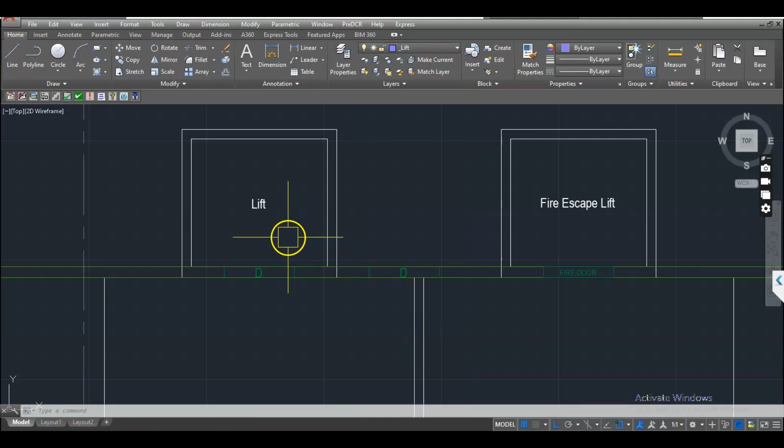First, let's learn to draw a lift. Go to the layer drop-down, select the lift layer, and draw the lift in the lift layer as a closed polyline. It should be drawn on the inner dimensions of the lift wall. Similarly, the lift should be drawn on the same location on all other floors till the terrace floor.

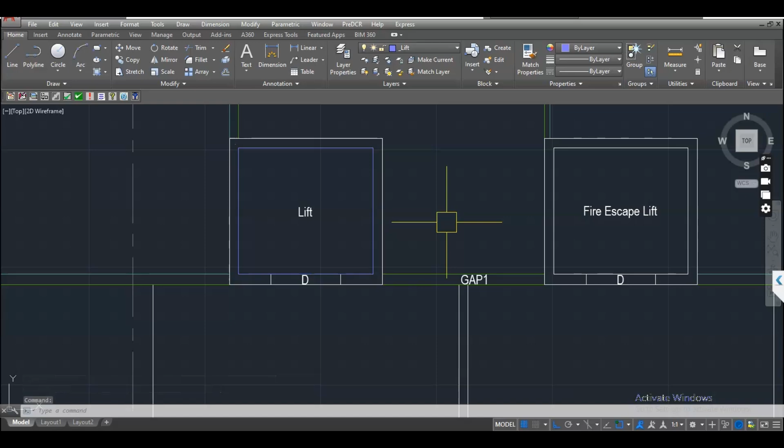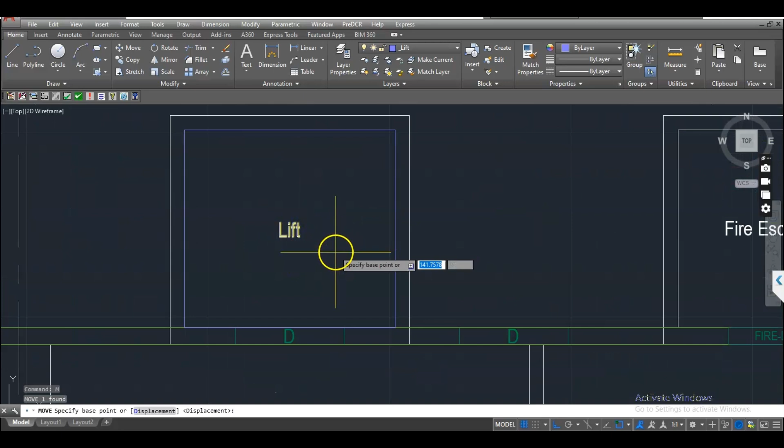The closed polyline must contain text, and the text must be on the lift layer. This text is treated as the name of the closed polyline. To give text, go to the Pre-DCR menu drop-down, select Mark, select Lift, and select the lift default option, which is normal lift. Select the lift closed polyline and press Enter. The system will auto-assign the text for the selected lift in a closed polyline.

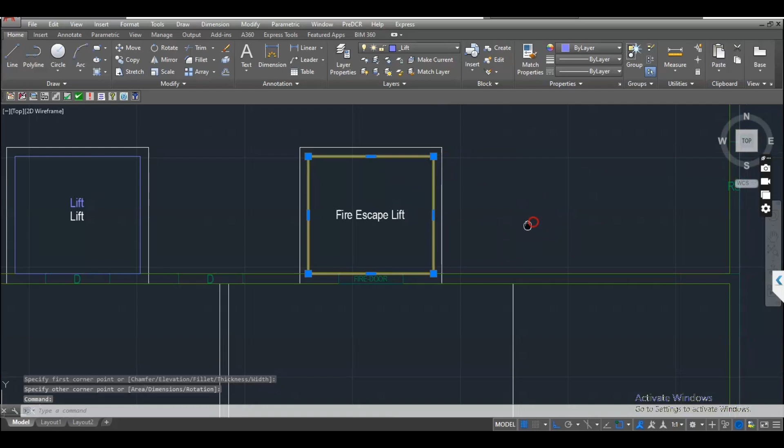Let's see how to draw a fire escape lift using the Pre-DCR. Go to the layer drop-down, select the lift layer, and draw the fire lift in the lift layer as a closed polyline. This should be drawn on the inner dimensions of the lift. Similarly, the fire lift should be drawn on the same location on all other floors till the terrace floor.

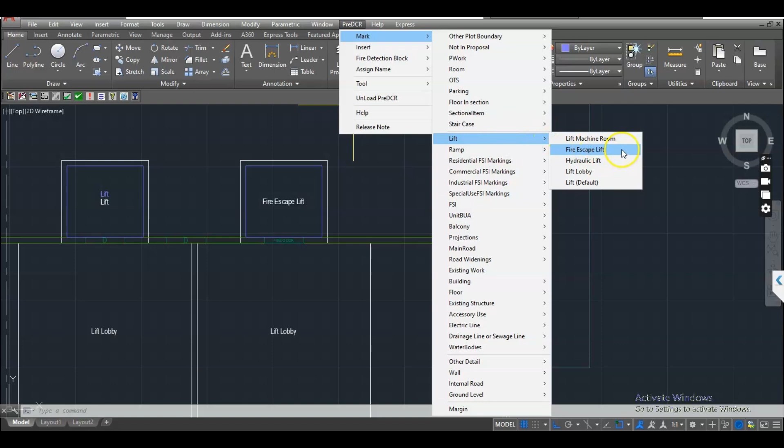The closed polyline must contain text, and the text must be on the lift layer. This text is treated as the name of the closed polyline. To give text, go to the Pre-DCR menu drop-down, select Mark, select Lift, and select the fire escape lift option. Select the fire lift polyline and press Enter. The system will auto-assign the text for the selected fire lift in a closed polyline.

A fire escape lift is used to help people evacuate during a fire or another emergency.

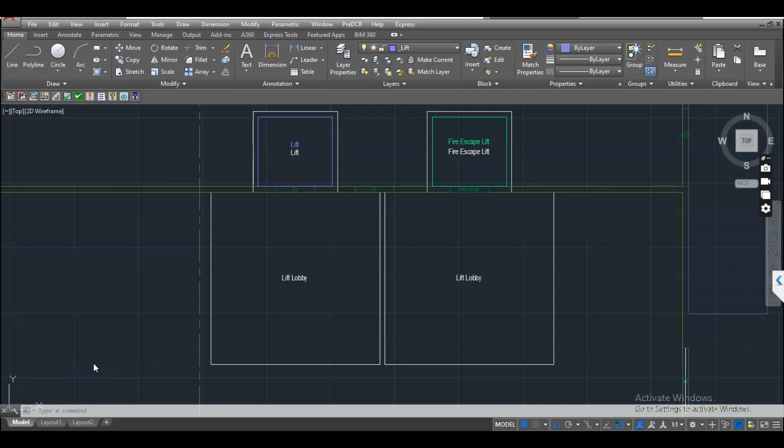Let's learn to draw a lift lobby. Draw the lift lobby in the lift layer as a closed polyline. Similarly, the lift lobby should be drawn on the same location on all other floors till the terrace floor.

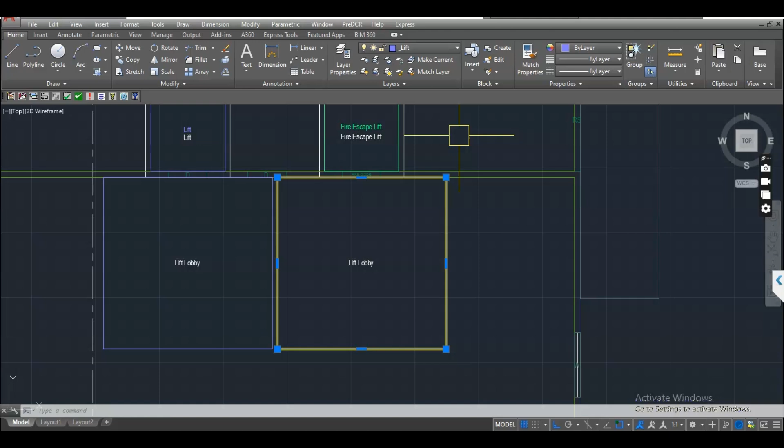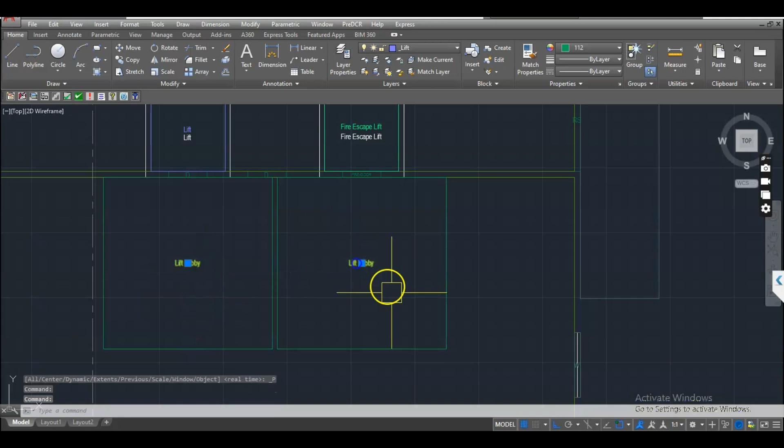The closed polyline must contain text, and the text must be on the lift layer. This text is treated as the name of the closed polyline. To give text, go to the Pre-DCR menu drop-down, select Mark, select Lift, and select the lift lobby option. Select the lift lobby polyline and press Enter. The system will auto-assign the text for the selected lift lobby in a closed polyline.

Now, let's see how to draw a hydraulic lift using the Pre-DCR. Go to the layer drop-down, select the lift layer, and draw the hydraulic lift in the lift layer as a closed polyline. This should be drawn on the inner dimensions of the lift. Similarly, the hydraulic lift should be drawn on the same location on all other floors till the terrace floor.

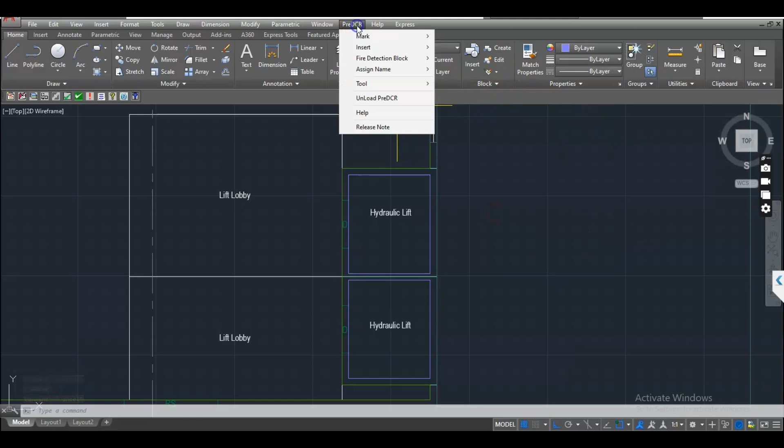The closed polyline must contain text, and the text must be on the lift layer. This text is treated as the name of the closed polyline. To give text, go to the Pre-DCR menu drop-down, select Mark, select Lift, and select the hydraulic lift option. Select the hydraulic lift polyline and press Enter. The system will auto-assign the text for the selected hydraulic lift in a closed polyline.

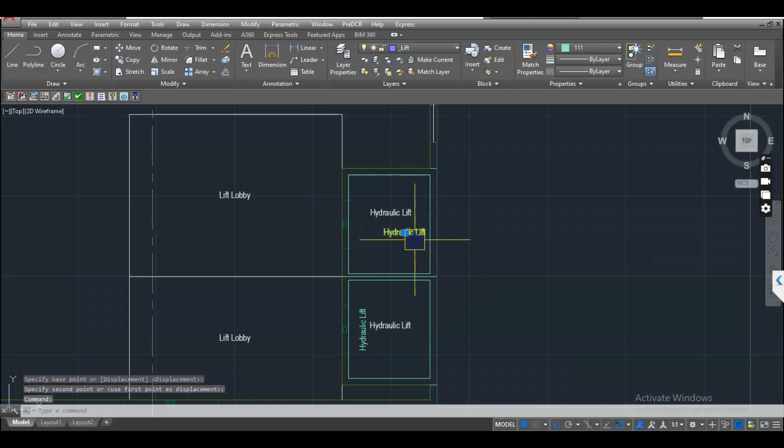Hydraulic lifts are used in many industries, including construction and industrial, for raising heavy items and materials.

Let's learn to draw a machine room. The machine room is drawn on the lift layer. Select the lift layer from the layer drop-down, and draw the machine room as a closed polyline with lift layer on the terrace floor.

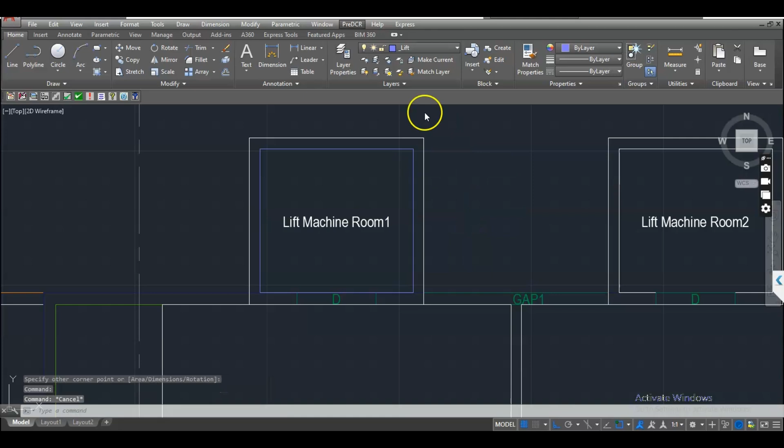Select Mark from the drop-down, select Lift, and select the lift machine room option. Select the lift machine room polyline and press Enter. The system will auto-assign the text for the selected lift machine room in a closed polyline.

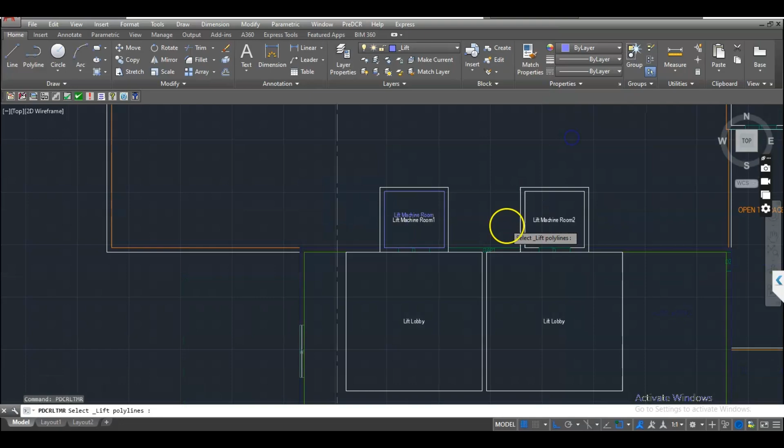Similarly, mark the machine room in section. The lift machine room polyline should be drawn as a dashed line type.